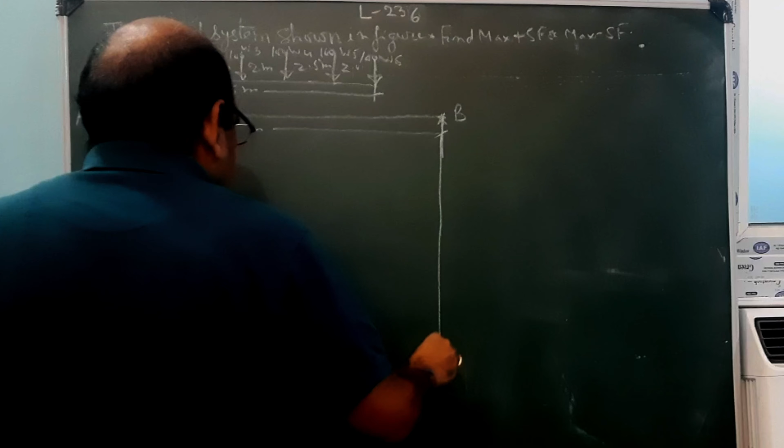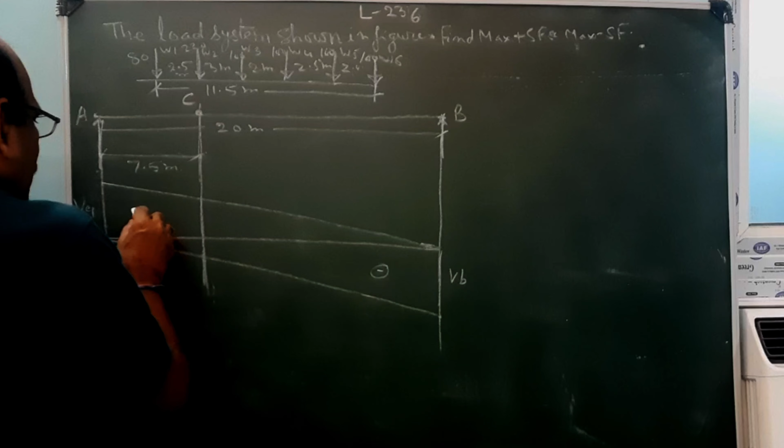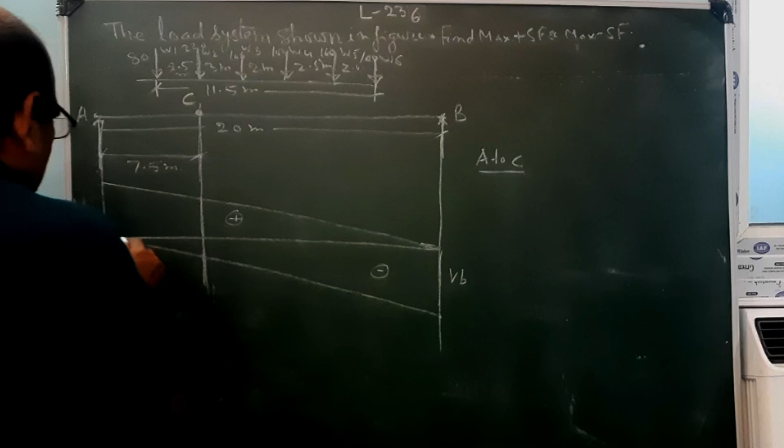At this point, this is your VA and this is your VB. This is negative and this is your positive. So A to C will be your this portion, only this portion, because A to C shear force is equal to VB, and C to B their shear force will be positive VA.

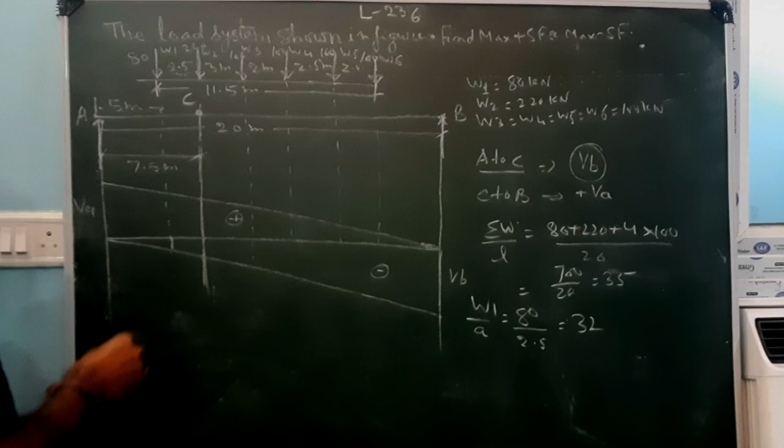This is 7.5, this is 2.5, so this is 5 meter. So we can find out this ordinate, that is your y upon this distance 5 equals to your VB, means 1 unit divided by whole 20. So y equals 5 by 20, 1 by 4, that is 0.25. This is 0.25.

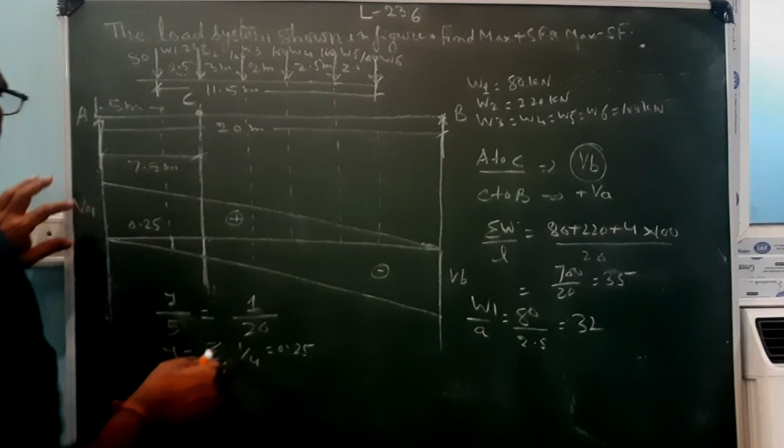Similarly you can find out this value. If you put C over here, we can find out this value from this point. This is your 1 by 20 and this is your 7.5, means 12.5.

This is 12.5. So your y will be 12.5 upon 20, which is 1.25 by... 0.625. This is 0.625.

And what will be this value? This is 7.5. So y2 upon 7.5 equals to 1 upon 20. So y2 equals to 7.5 upon 20.

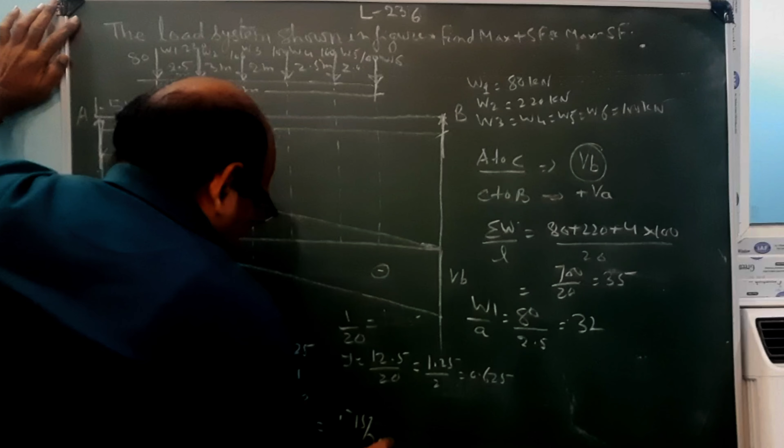So this will be your 0.75 by 2, so y2 is equal to 0.375. This is 0.375. Similarly, you can find out this value also.

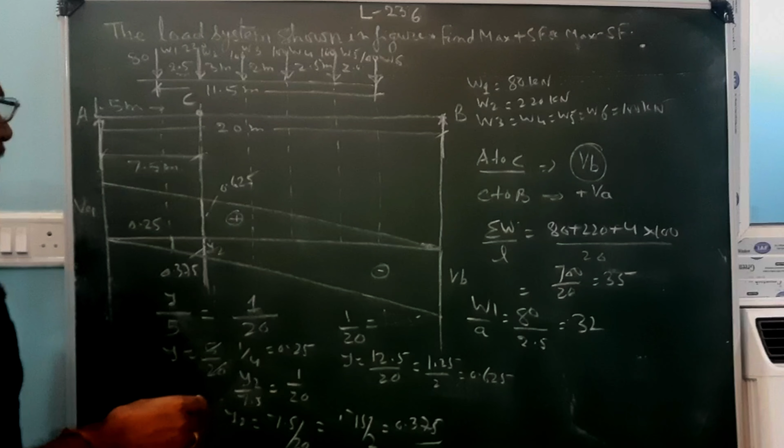0.475. This is your 0.475. And what about this? This will be...

This is your 0.275. And this is your minus 2, 3.5 upon 20. So this is 0.175. So by this you can always find out the ordinate.

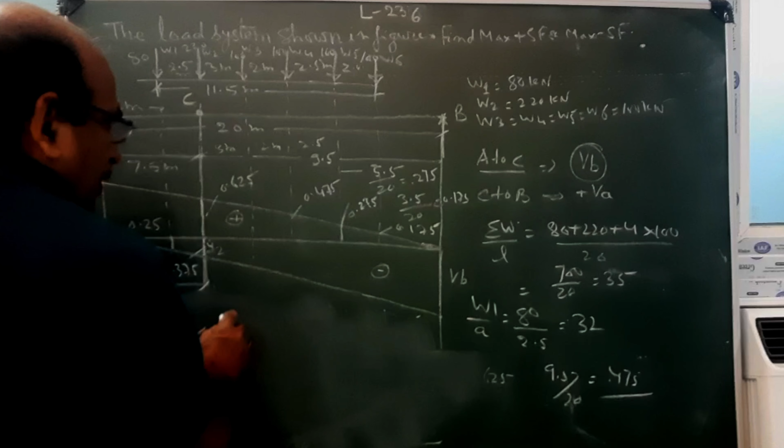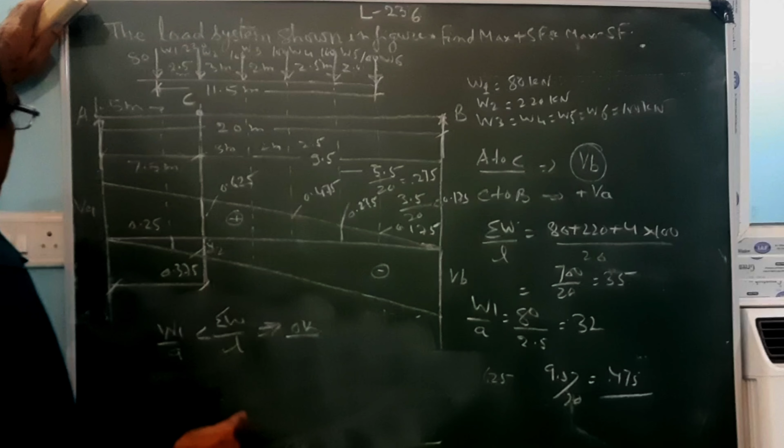So this will be your, what will be the values? Values will be 80 into 0.375, minus plus this will be your 220 into 0.625. If it is put just right, 0.625, this is 0.625.

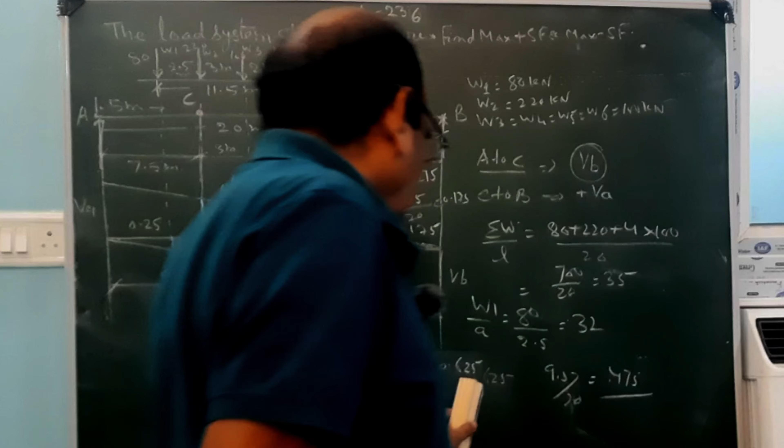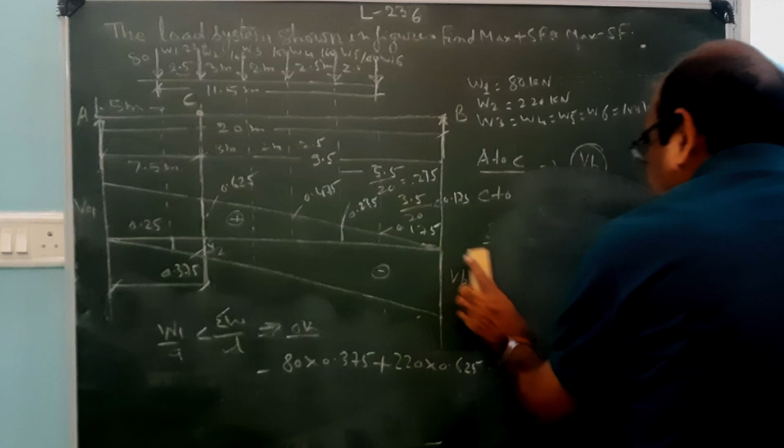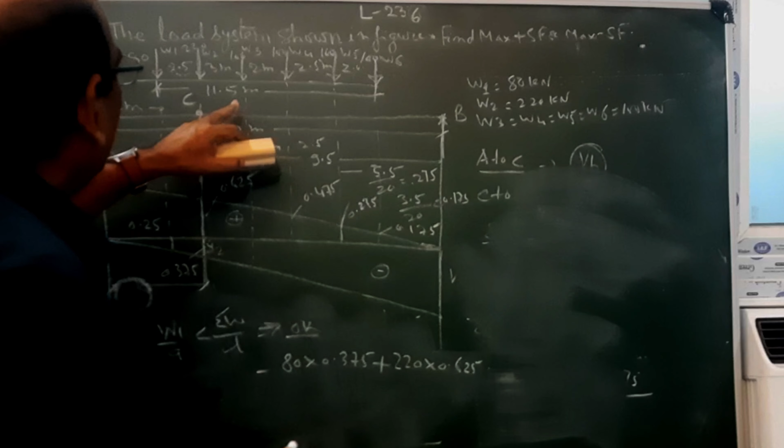This we are getting. We are not taking that point, that minus point, because we are putting it just right. So this y2 is not taken in consideration. So this is 0.625, and for W3 it is 100 plus 100 into...

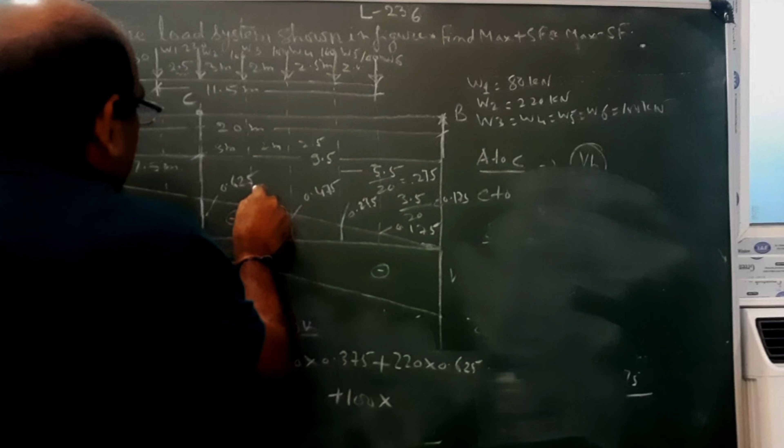This, how much is this? This value we have not found. This is your 7.5 plus 3, that is 10.5. So this distance is equal to 9.5. 9.5 upon 20 equal to 0.95 by 2.

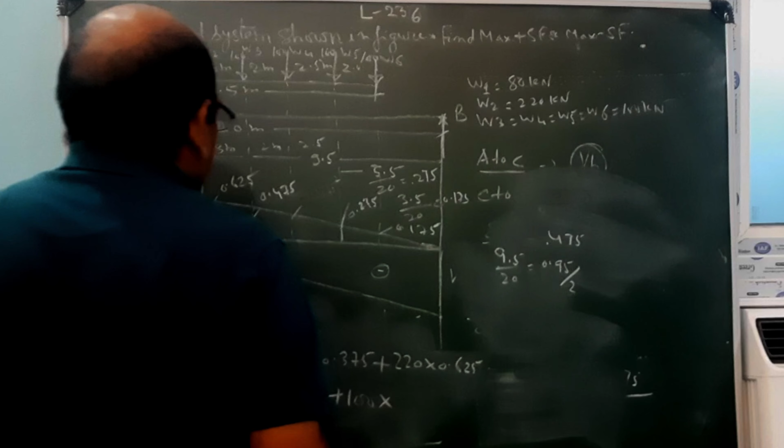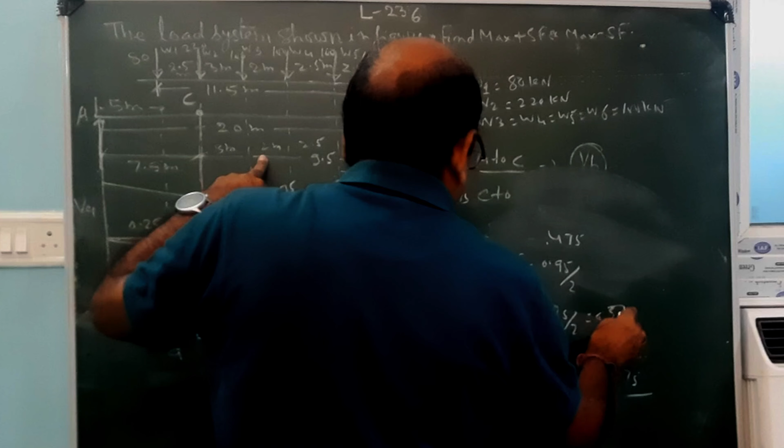2 fours 8, 2 7 14, 0.475. This is coming 0.475. 7 and 3, 10 equal, yes. And this is your 10.5, that is 9 point, this is your 0.475, and this reduced by 2 to 7.5 upon 20. So 0.75 upon 2, 0.375. This is 0.375.

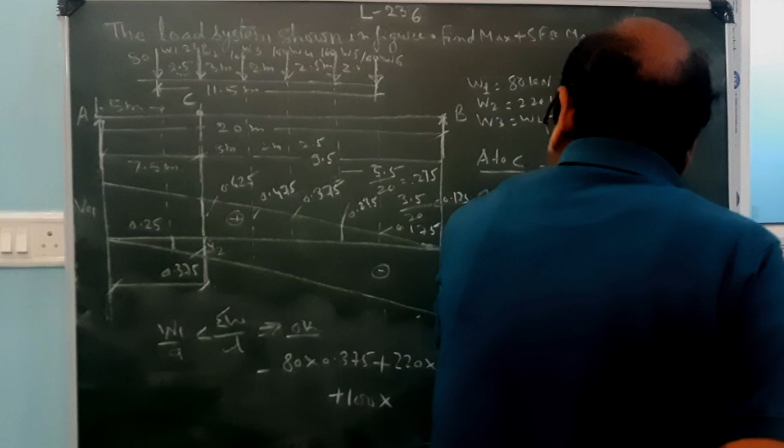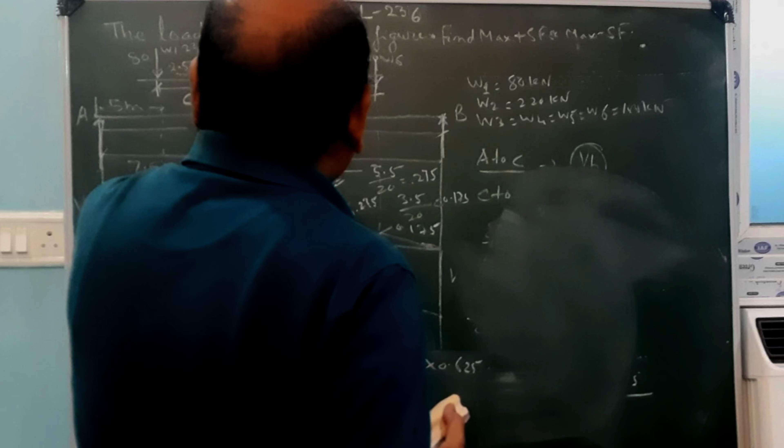And if you reduce 2.5, we are getting perhaps 0.275. This is your 2, means this is 7, 10.5, 12.5, 12, or 15, 5 upon 20, 0.25. So this is your 0.25.

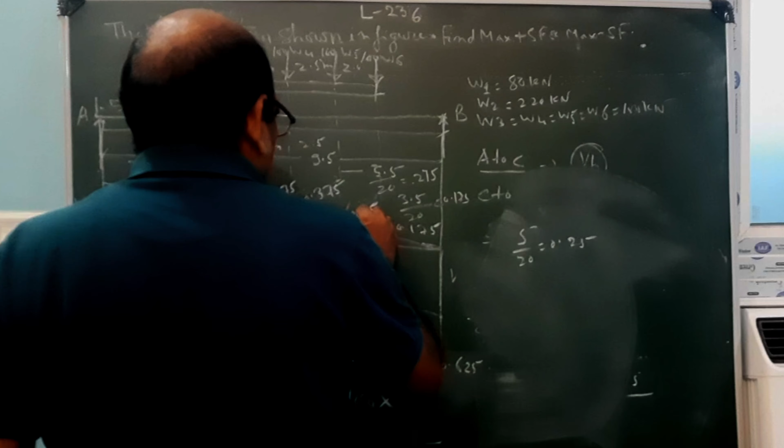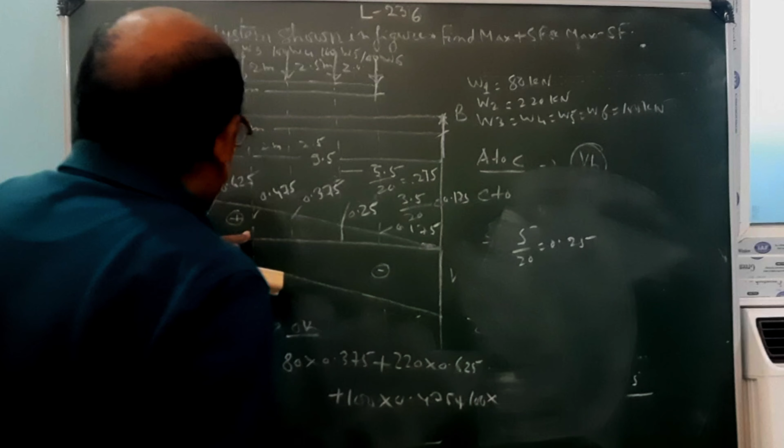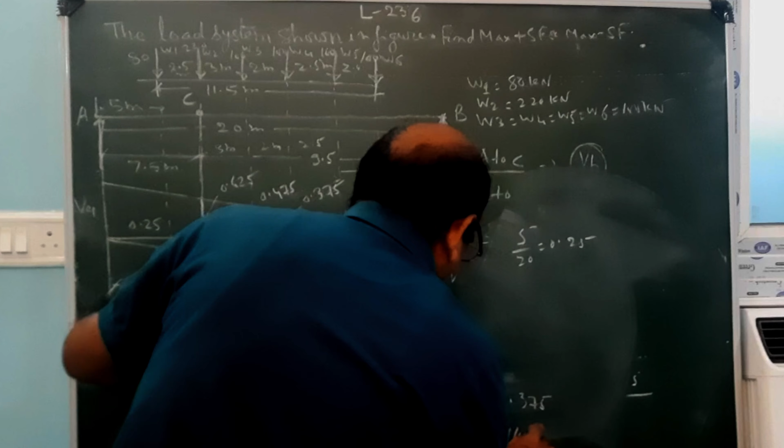And this is 0.175. So multiply with 100 by 0.475, plus 100 multiply by 0.375, and plus 100 multiply by 0.25 plus 100 multiply by 0.175. This is your total shear force which you can calculate.

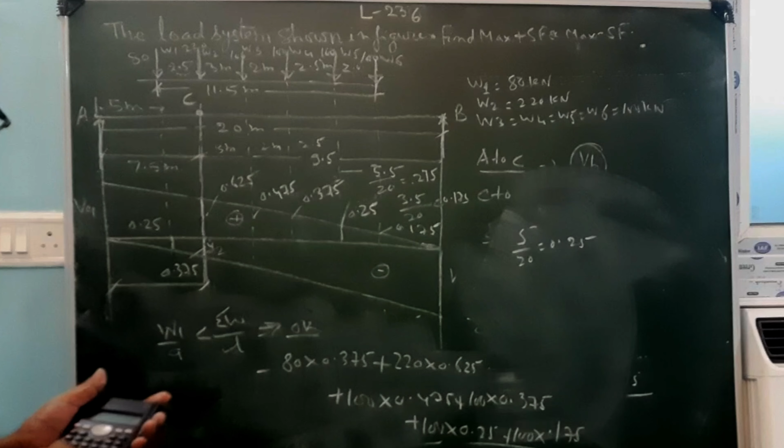This will be something like this. This is minus 80 means 220 into 0.625 plus 47.5

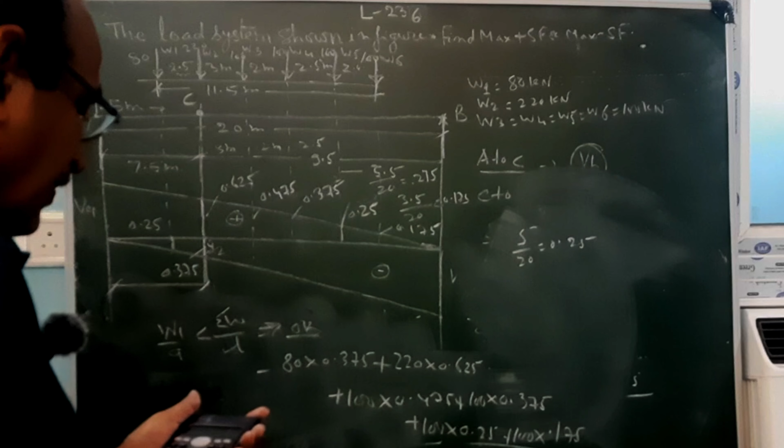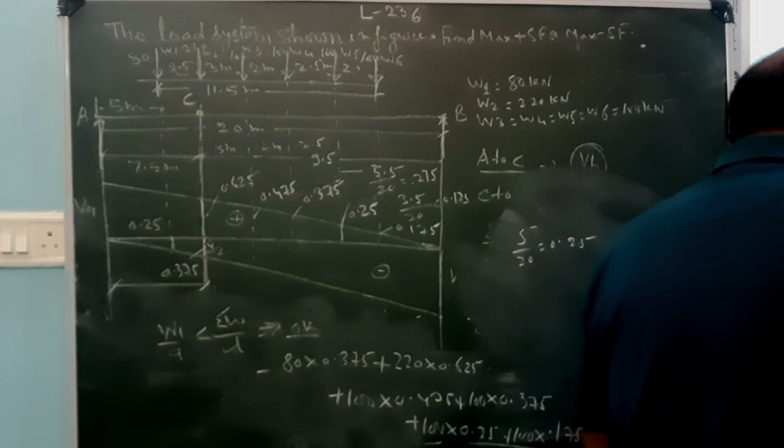plus 37.5 plus 25 plus 17.5, and minus 80 into 0.375. This is coming 230. This is coming 230, or something like that. Please check it, this is 230 or something like that.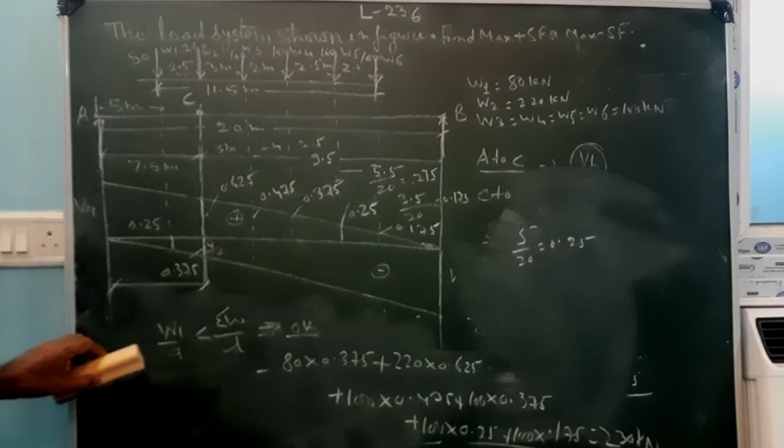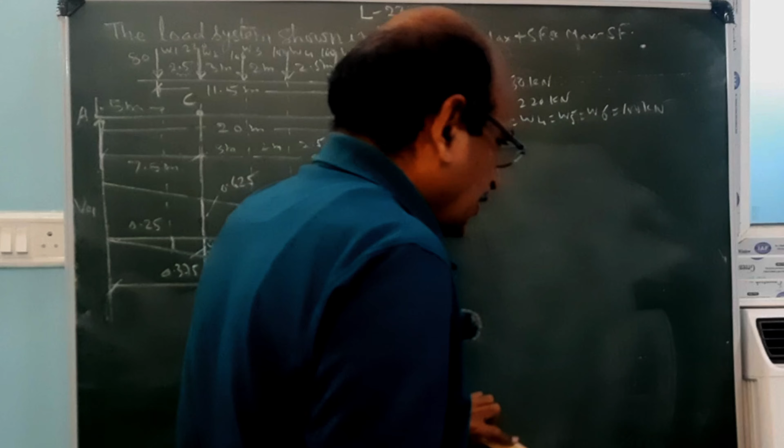And what will be the maximum negative if you put this thing, how you will put the loads? For maximum negative, what will we do? This is maximum negative portion, so we can put load

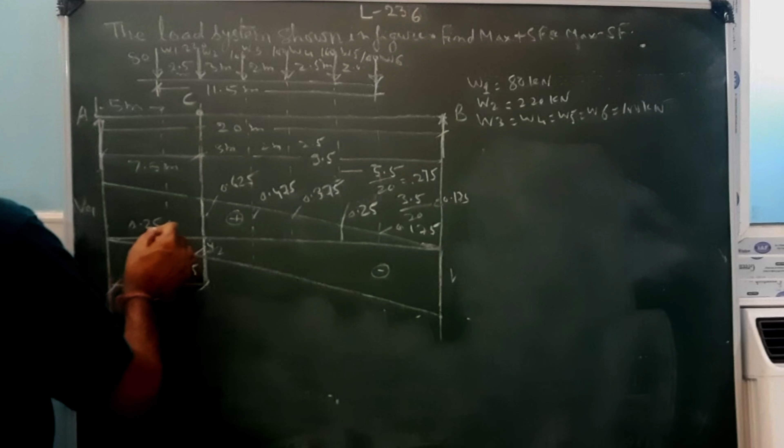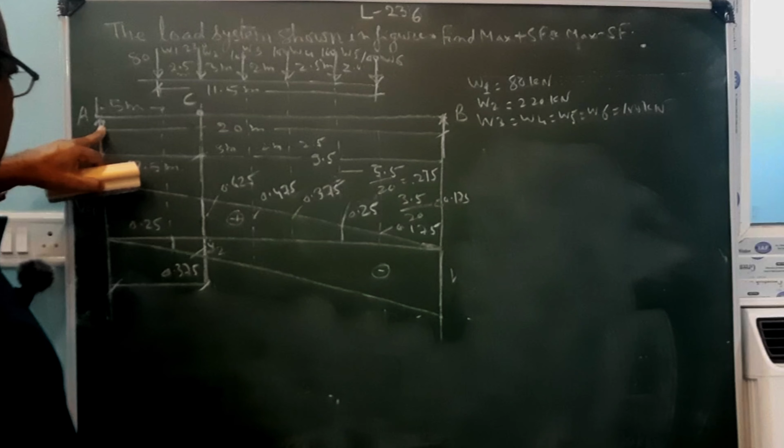somewhere, this thing W3, at 2.5, if it goes here in the 7.5, so 3 loads will come here in this direction, so this will be negative and this will be positive.

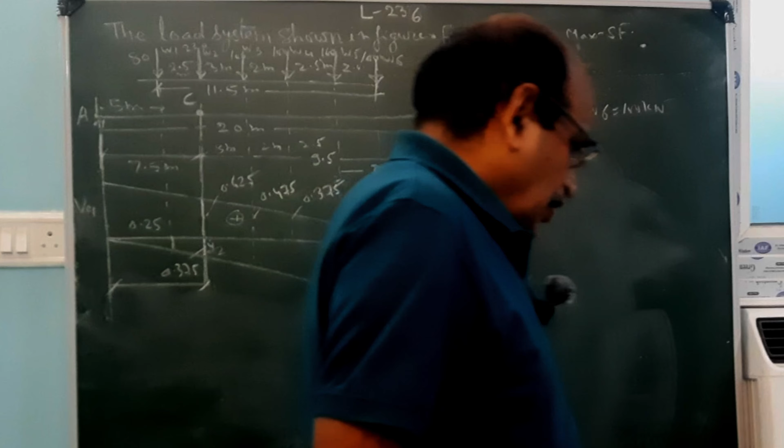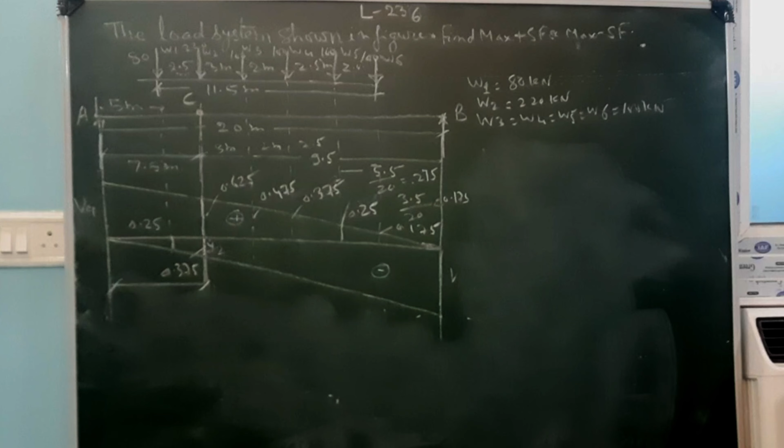So how to check this thing? You can calculate by putting negative values, maximum negative value. This is what we can calculate, so this is okay, we can go for this.